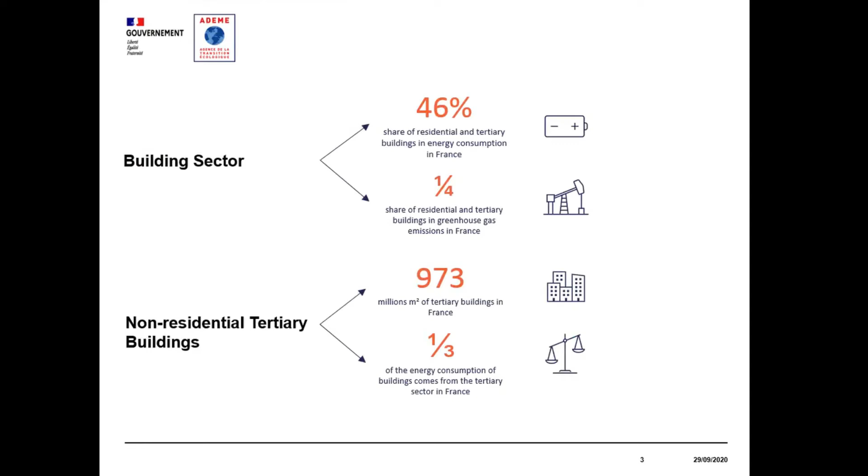So slide 4. This new regulation has a general objective to reduce the final energy consumption of the existing tertiary building stock at the national level for all buildings subject to the obligation of at least 40% in 2030, 50% in 2040, and 60% in 2050, compared to a reference year of 2010.

This regulation was introduced after a long process by the law named ELAN in 2018, which is a significant legislative change. Indeed, it is an obligation on energy-saving actions, not limited only to work on buildings, but extended to all actions to reduce the energy bill, quality and operation of equipment, user behavior, etc. Plus objectives set by decade with a strong commitment from the first decade.

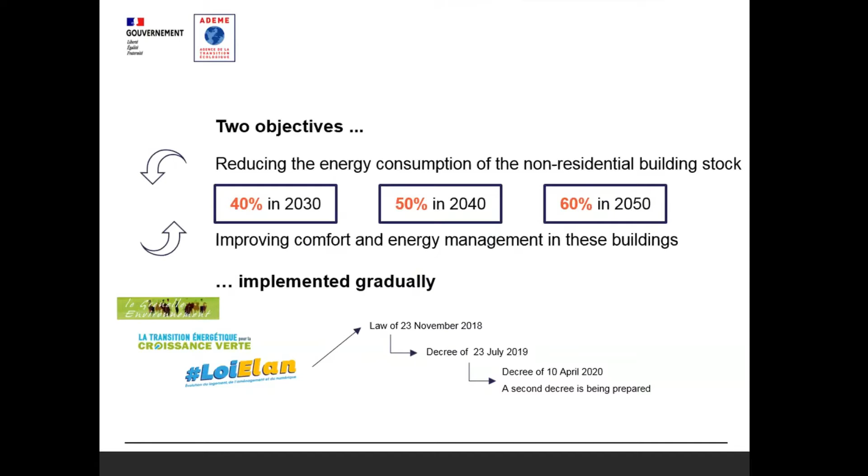So the obligation is expressed in final energy on all the energy uses, and we are waiting for a second decree before the end of the year. So slide 5, please. So which buildings and premises are concerned by this regulation? So slide 6.

All that is not from the primary and secondary sector is considered as tertiary sector. So many types of buildings and premises are concerned, commercial or non-profit activities, public or private owners, and different activity sectors as specified in this slide, so commercial buildings, office buildings, educational buildings, and so on. Both building owners and tenants must comply with energy saving requirements.

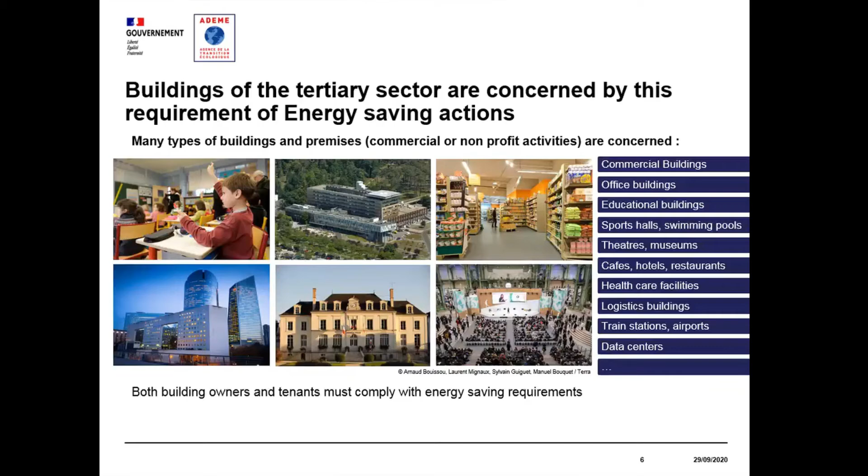So slide 7. All the existing buildings at the date of publishing of the law in 2018 are concerned with an area over 1,000 square meters. So the adopted general principle is to integrate the entire tertiary sector into the tertiary eco-energy system in order to ensure equal treatment, group dynamics, and the obligation is established at the level of buildings, part of buildings, or set of buildings. There is only a narrow scope of exempted buildings such as churches, defense buildings, civil and internal security.

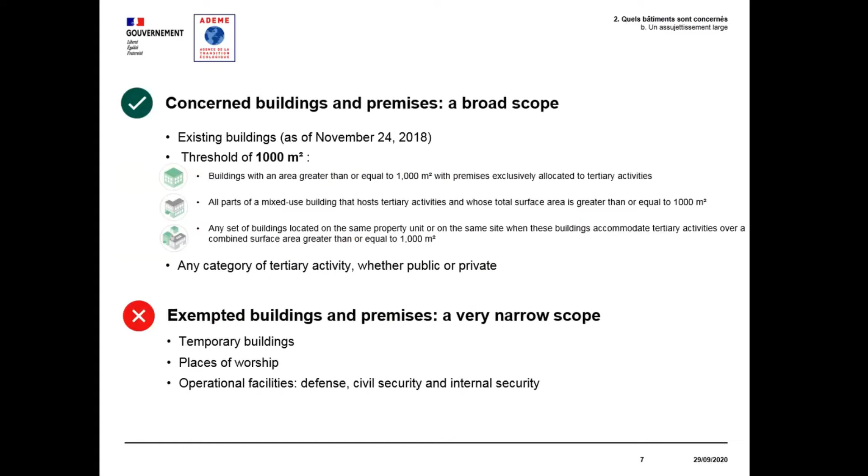So slide 8. So the key principles of this regulation, slide 9. The situation of tertiary actors with regard to this general objective is different depending on whether some have not yet implemented actions to reduce their consumption, or others have already implemented actions in this area. That is the reason why the first actors will move toward the so-called relative value objective, and the second will seek to achieve the so-called absolute value objective.

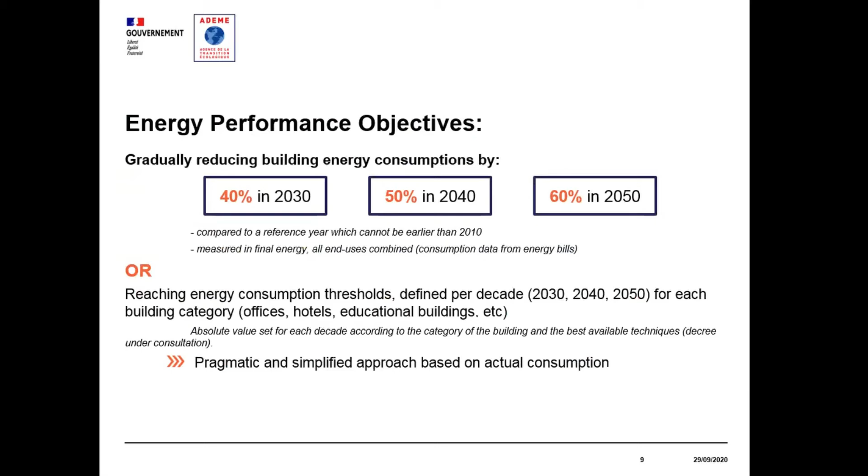So the relative value objective is to achieve a reduction in the final energy consumption of the building of at least 40% in 2030, 50% in 2040, and 60% in 2050, compared to a baseline in 2010 or after 2010. The level of consumption expressed in absolute value is defined by decade in order to take into account the best available techniques, the particularities of each category of activity, and where applicable regulatory changes like constraints, air treatment, etc. Slide 10. So this is to illustrate both options.

For example, in case 1, if the energy baseline in 2010 is quite high, for example 200 kilowatt-hours per square meter, the absolute value could be fixed by decree, for example at 50 kilowatt-hours per square meter. So it will be more interesting to reach the relative value defined by the reduction of 40% in 2030.

In the second case, with a quite efficient building, if the energy baseline is, for example, 60 kilowatt-hours per square meter, the effort to get the absolute value will be a reduction of only 10 kilowatt-hours. And to get the reduction of 40%, the effort will be a reduction of 24 kilowatt-hours. So in this case, it will be more interesting to choose the option of the absolute value.

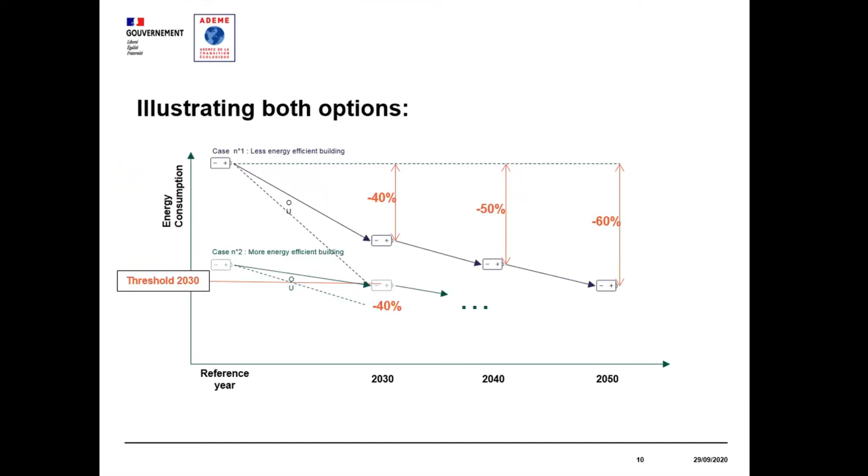Next slide, slide 11, sorry. So all the action levels can be used to achieve these targets. These actions do not all require large financial investments, but all contribute to reduce the energy bill. So improve the energy performance of the building through the building envelope, for example, install high performance equipment and control and active management devices, service equipment, but as well optimizing the use of equipment and working on the

behavior of occupants. So this regulation sets an obligation to reach a result of energy savings compared to a baseline. The building owners and tenants are free to implement any means to reach this target. That's the reason why tools such as energy performance contracting should accelerate their development with this regulation. So slide 12, please.

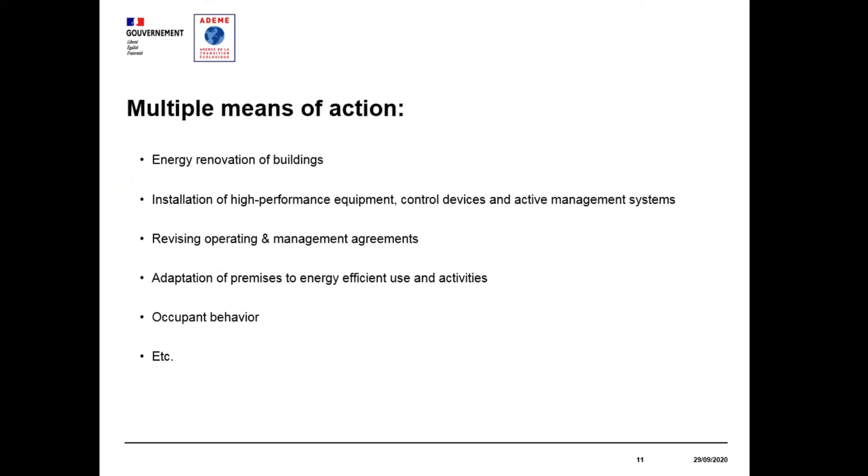So energy saving targets can be adjusted in case of technical, architectural, or patrimonial constraints, in case as well of changes in activity type, taking into account the evolution of volume of activity. And as well, they can be adjusted in case of disproportionate economic effort and impact of the action plan.

So slide 13, please. So there is a platform named OPERAT, which is operated by ADEME. The annual consumption data from the year 2020 must be sent to this platform before September 30. So each owner or tenant of tertiary buildings subject to this obligation must send every year information to this platform. So slide 14.

OPERAT is used by the state to control how persons implement the regulation on their building. But it is as well a tool for persons to monitor, verify, benchmark their buildings. So the building owners or tenants must declare to OPERAT the definition of a baseline of the year 2010 or after, their annual consumptions, and in return OPERAT automatically provides a certificate of consumption compared with targets.

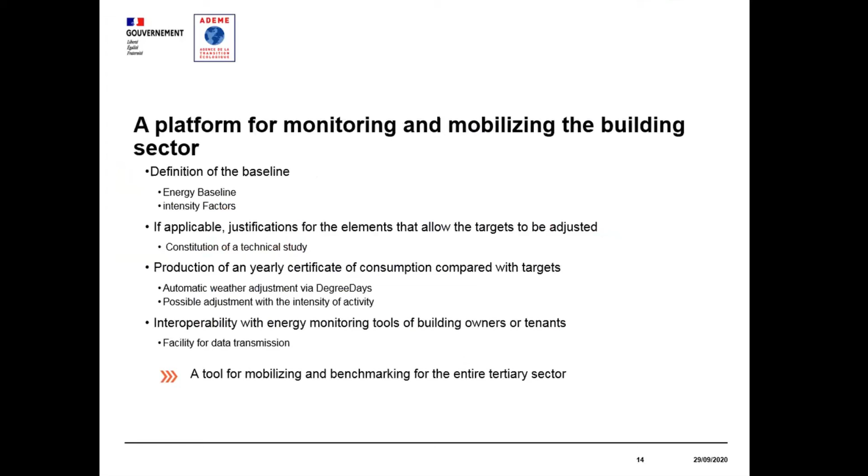There is an automatic weather adjustment via the degree days and a possible adjustment with the intensity of activities indicators. There is an interoperability with energy monitoring tools of building owners or tenants, so that there is a facility for data transmission. So slide 15.